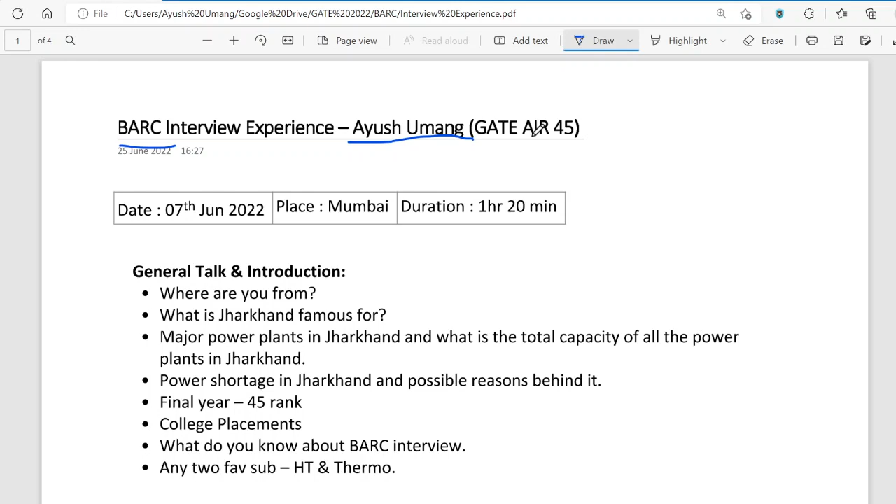In this video, I will be sharing my experience of BARC interview which took place on 7th of June in Mumbai. So let's start. In my interview, it went somewhere around 1 hour and 20 minutes.

Talking about the BARC interview, it is one of the most difficult technical interviews in India. They basically grill you for about an hour and judge you based on your technicals only. There will not be any HR question as such as what happens in other PSUs. They will judge you on your technical knowledge and concepts only.

So first they will ask you to sit in a chair in front of the panelists, and there they will ask few questions about yourself, for 5 to 6 minutes, just to calm you down so that you don't have any nervousness, and they get a clear picture of your understanding of concepts.

So for the first 5 minutes, they asked me about myself, where I am from. I told I'm from Jharkhand. So they asked what is Jharkhand famous for, and I answered that there are a lot of coal mines in Jharkhand and a lot of minerals are available in Jharkhand.

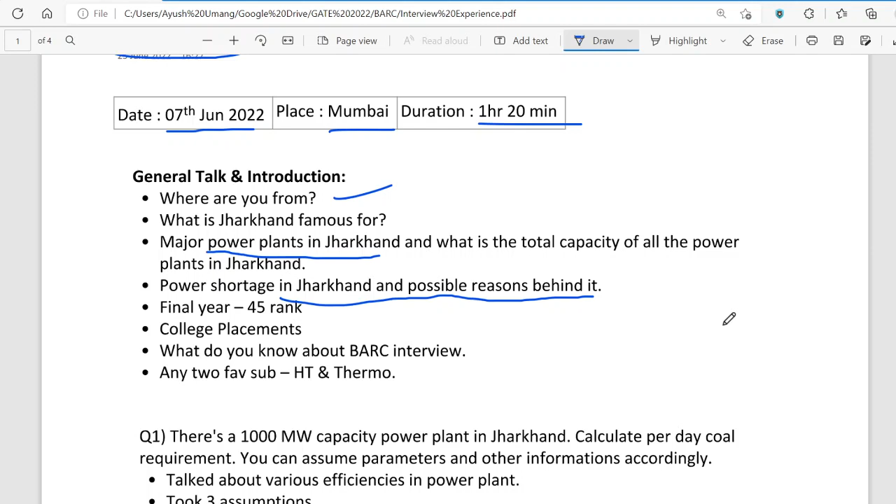Then they asked questions on what major power plants are there in Jharkhand and what is the total capacity of all the power plants in Jharkhand. I told them a few names of the power plants, but I could not answer the total capacity. Then they asked, there is power shortage in Jharkhand, what could be the possible reason behind it? I answered that there are some political reasons behind this and all that, but they were not satisfied.

After that, they asked me about my GATE score, which I scored in final year. They talked about that for a few minutes, and then they asked me about my college placements. I got placed into Hindalco Industries, and they asked what package does it offer, what is the place of posting, and all of that.

Then they asked, do you know about BARC interview? And I answered them yes. Then they asked, what happens in BARC interview? And I explained them for a few minutes.

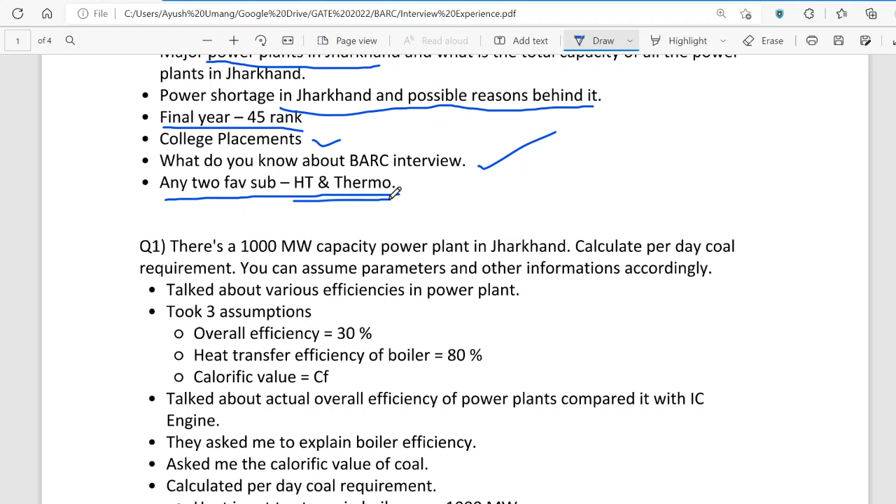Then they asked me any two favorite subjects, and I told them heat transfer and thermo. But after that, they said that we are not going to ask questions from these two subjects only, we are going to ask questions from each and every subject of BTech. Are you comfortable? I said yes, sir.

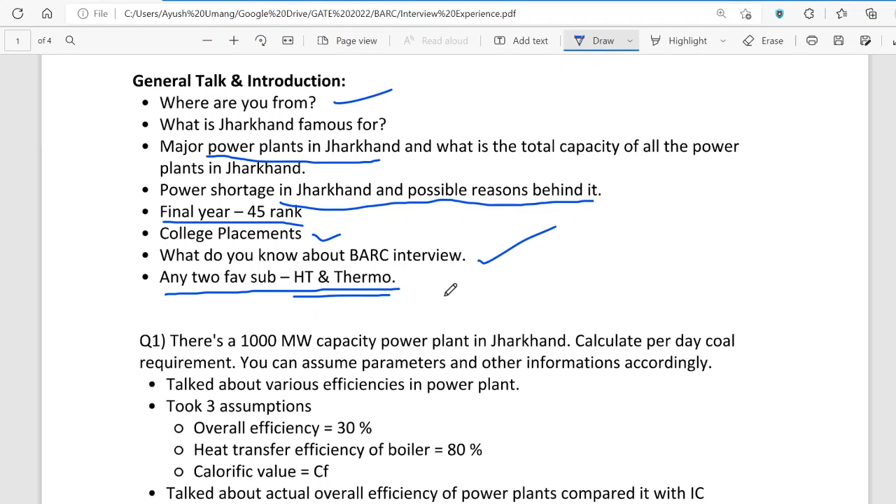Then they asked me to go to the blackboard, and my technical interview then started.

So one panelist then asked me to suppose there is a 1,000 megawatt capacity power plant in Jharkhand, and I need to calculate coal requirement on a per day basis. You can assume parameters and other information accordingly.

Then I approached the problem talking about various efficiencies in power plants, and I took a few assumptions, like overall efficiency at 30%, heat transfer efficiency of boiler at 80%. I did not know the calorific value of coal, so I assumed the value to be Cf. I asked them, sir, I don't know the calorific value of coal. Then they told me that I can assume any variable.

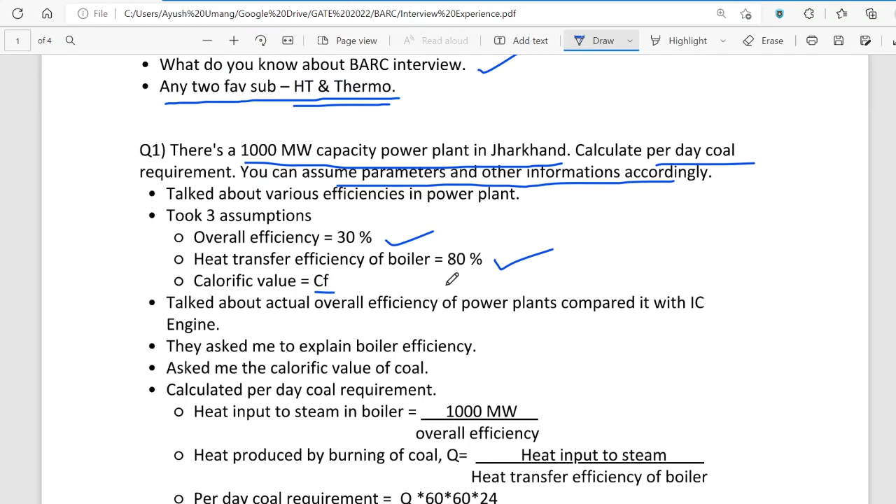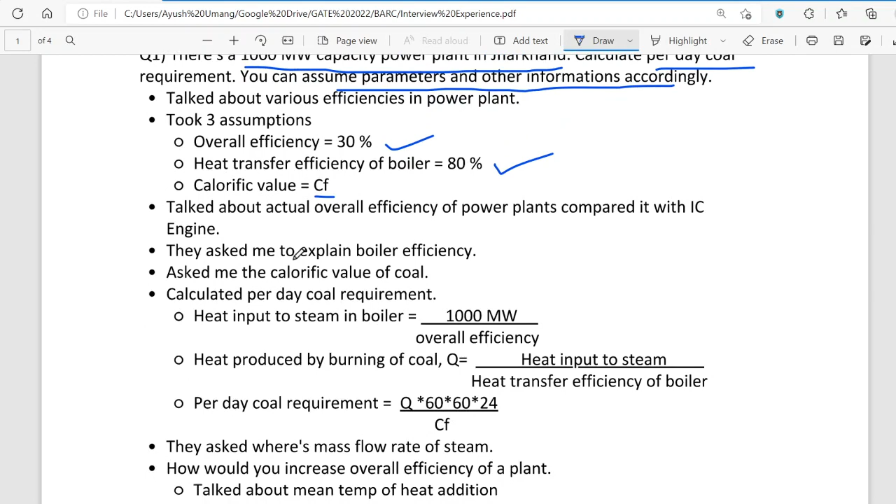After that, we had a few conversations about overall efficiency of plant - why I had taken 30%, why not 70%, 50%, or 10%. Then he asked me to compare it with IC engine efficiency. What is the efficiency of an IC engine? Why is the efficiency of a power plant more than an IC engine?

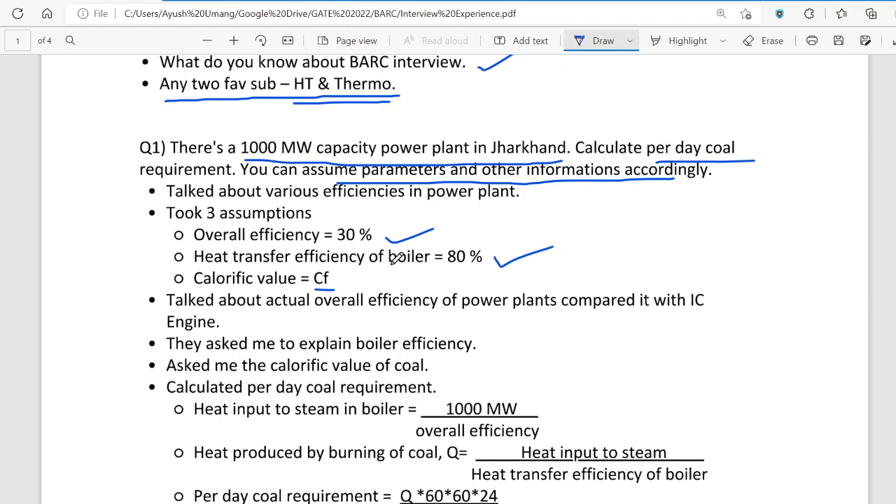After that, they asked me to explain boiler efficiency. What is boiler efficiency? I had taken boiler efficiency in my calculations.

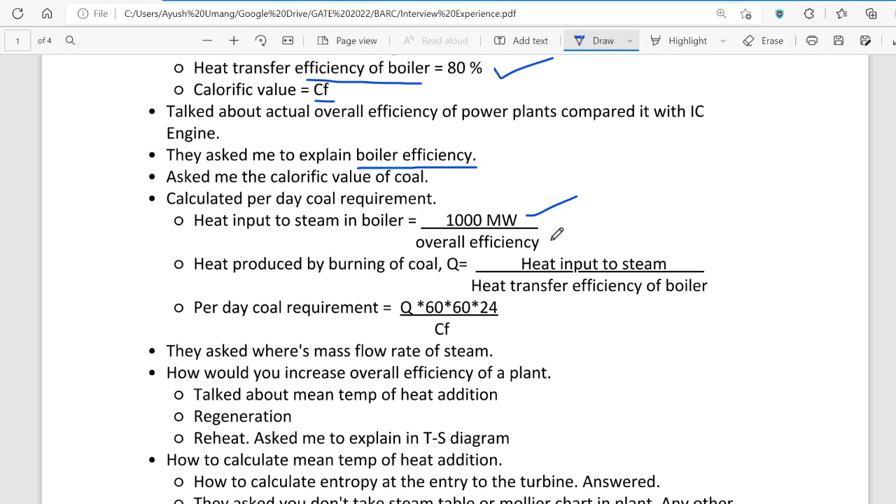After that, I used these formulas: heat input to steam in boiler - this is our power output. I divided it by overall efficiency to get heat input to the steam, and then I divided it by the boiler efficiency to get the heat produced by burning of coal. The value of Q we got was in megawatt, so I converted it into per day basis by multiplying by 60 seconds, 60 minutes, and 24 hours, divided by calorific value of coal to get per day coal requirement.

After that they asked me, you have not taken mass flow rate of steam in your calculation, don't you need that - just to confuse me. And I told them that sir, mass flow rate is not required in this calculation, because our calculation is already based on time, on a per second basis, and here I just need to convert it into per day basis.

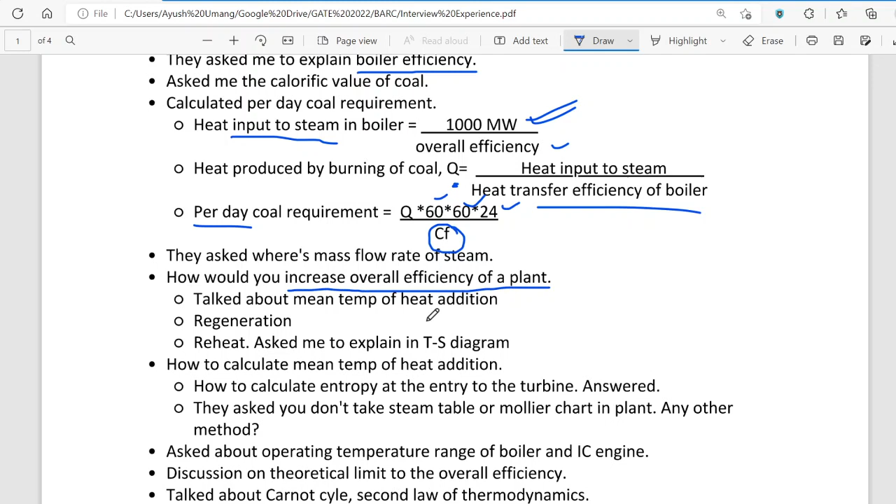Then they asked me how you can increase the overall efficiency of the plant. I talked about the mean temperature of heat addition, regeneration, reheat, and they asked a few cross questions on these two, and asked me to draw a TS diagram and explain all three topics on the TS diagram.

Then they asked how would you calculate mean temperature of heat addition in plants. I answered that we need entropy at the entry of the turbine and at the exit of the pump, and using that we can calculate the mean temperature of heat addition.

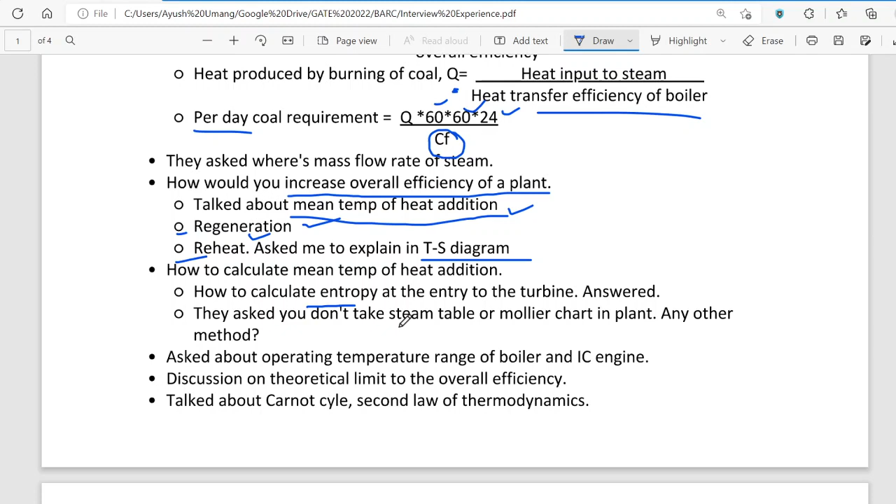He then asked, you don't take a steam table or Mollier chart in the plant, so is there any other method to calculate entropy? I was not able to answer this, because we have only studied calculating entropy using the steam table and Mollier chart, so I answered clearly that I don't know any other method of calculating entropy.

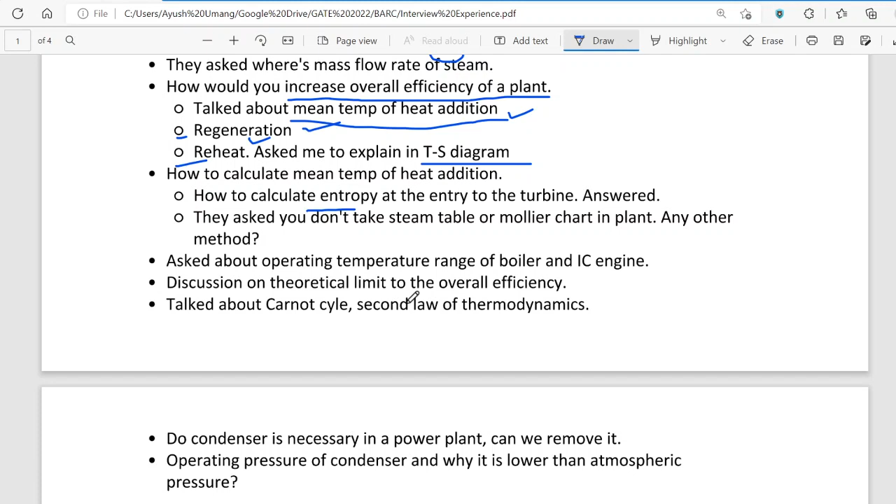Then they asked me about the operating temperature range of a boiler and IC engine. I told them, and then a few discussions went on about the theoretical limit to overall efficiency - why not 50, 60, 70, 80%. We talked about the Carnot cycle and how the upper limit to efficiency is fixed by the second law of thermodynamics.

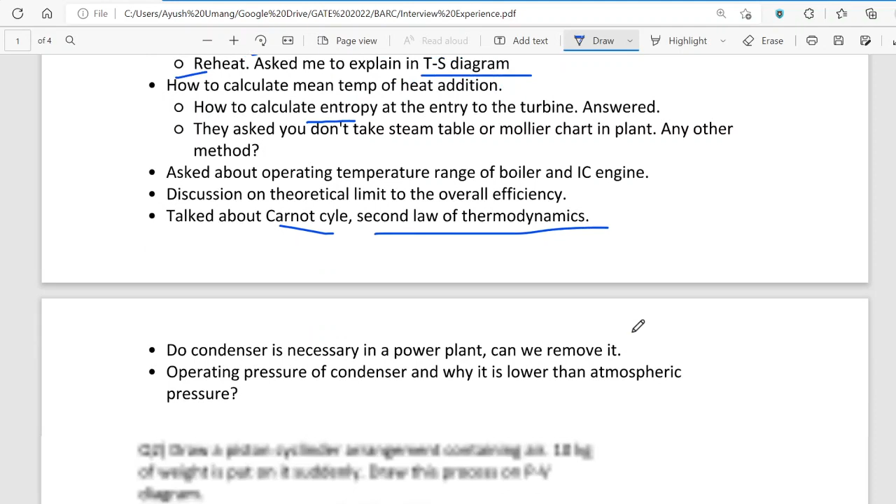Then they asked a question on the condenser - why is it necessary in a power plant, can we remove it or not? I told them. Then about the operating pressure of the condenser and why it is lower than atmospheric pressure - why not higher or equal.

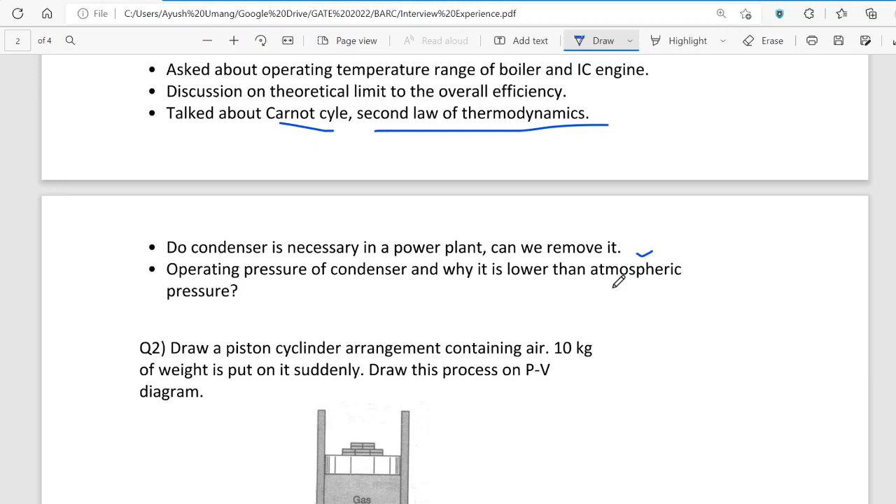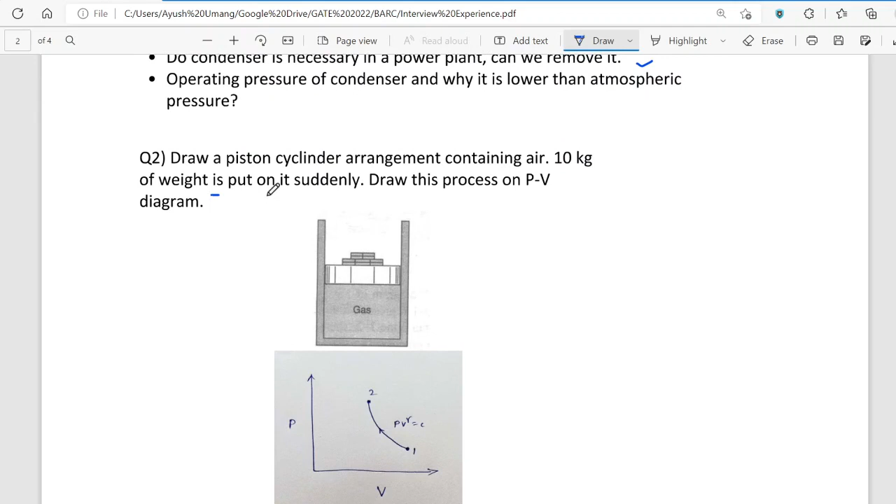After that, another panelist asked me to draw a piston cylinder arrangement containing air, and said that 10 kg of weight is put on it suddenly, and asked me to draw this process on a PV diagram. Because the weight is put on suddenly, it is an adiabatic process, and I drew the adiabatic process 1-2 as shown in the figure.

He then asked what is adiabatic and why it is adiabatic - I explained. Another member told me to leave it for a long time after putting the weight and now draw the process. I told them that if we leave it for, say, infinite time, heat will start flowing out of it, and this would be a constant pressure process - constant pressure heat rejection. So this would be the process.

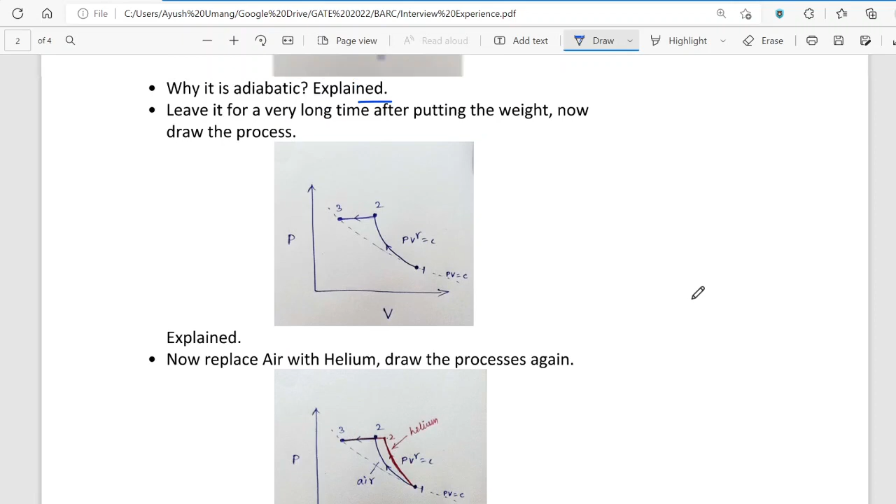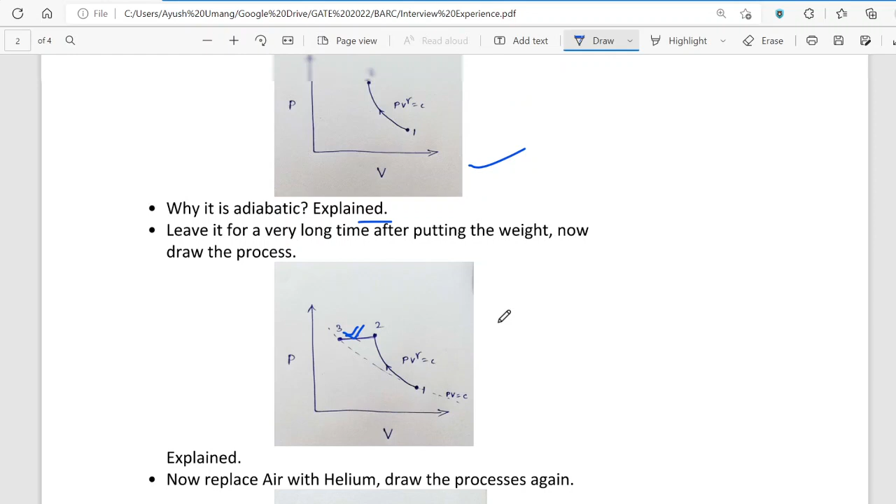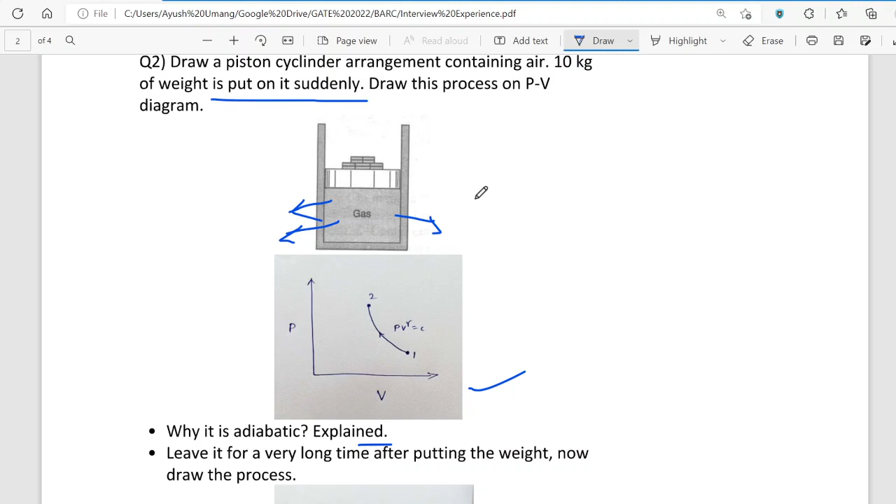Then he asked how would you point out this point 3. I told them we can point out point 3 by drawing an isothermal line from point 1, because the dead state, which is reached after the gas is in equilibrium with the surroundings, is at the same temperature at which it was initially. I explained this.

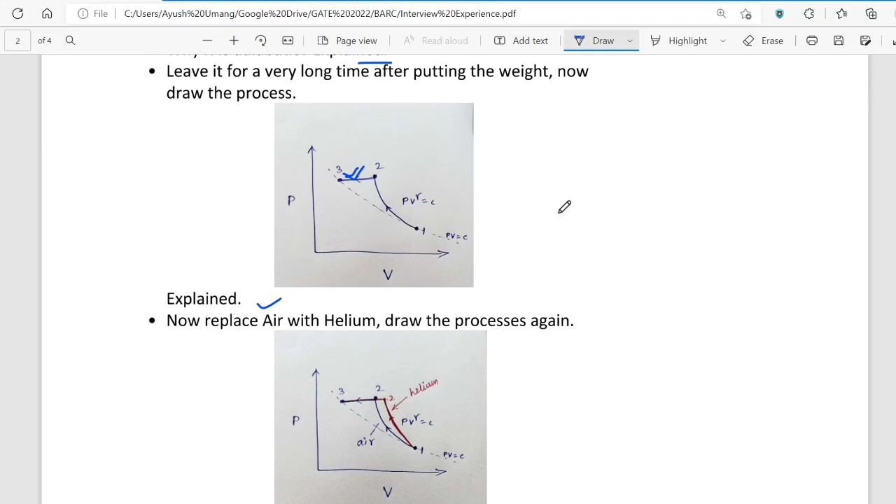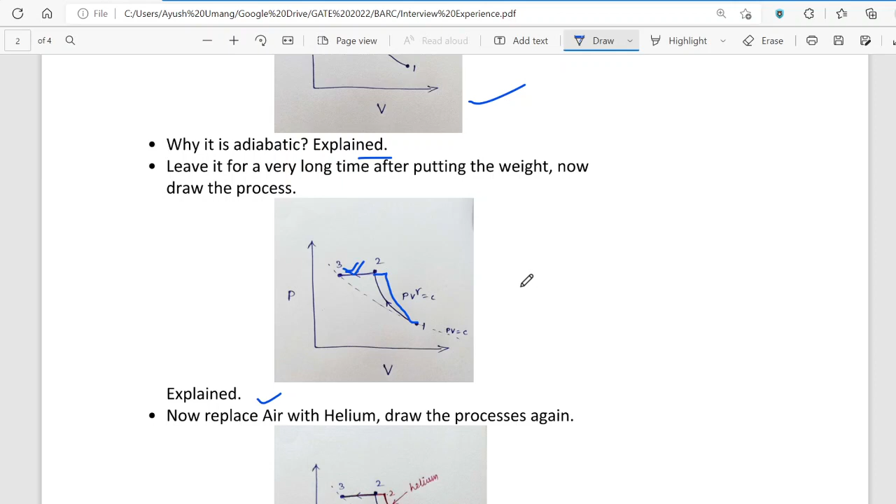Now they asked me to replace air with helium and draw the process again. I answered that this process would be the same, but the slope of this line would get shifted like this, because the adiabatic index gamma of helium is greater than that of air - 1.67 as compared to 1.4 for air. So this would look like this.

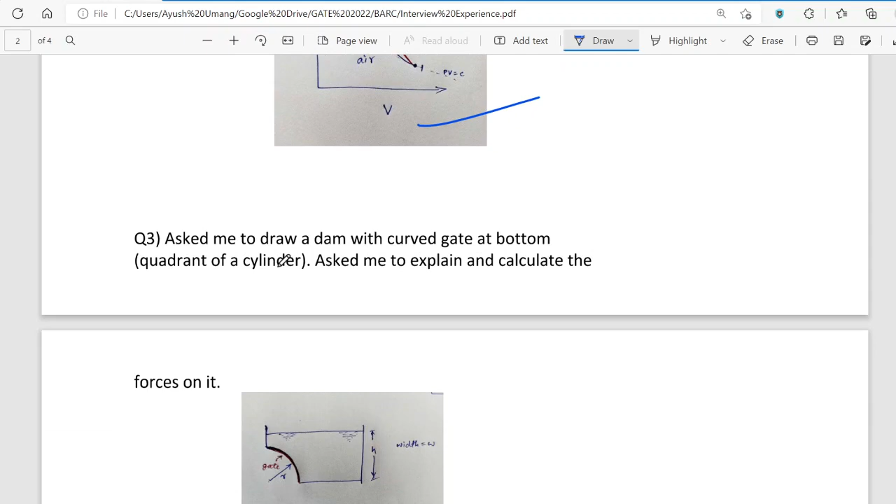They looked satisfied. After that, another member asked me to draw a dam with a curved gate at the bottom, like a quadrant of a cylinder, and asked me to calculate forces on it. I drew something like this, and he asked me to calculate forces on this curved plate. I explained that this would be the vertical and this would be the horizontal force acting - the horizontal force would be equal to the pressure at the CG multiplied by the projected area, and the vertical force would be the weight of water carried by this part of water.

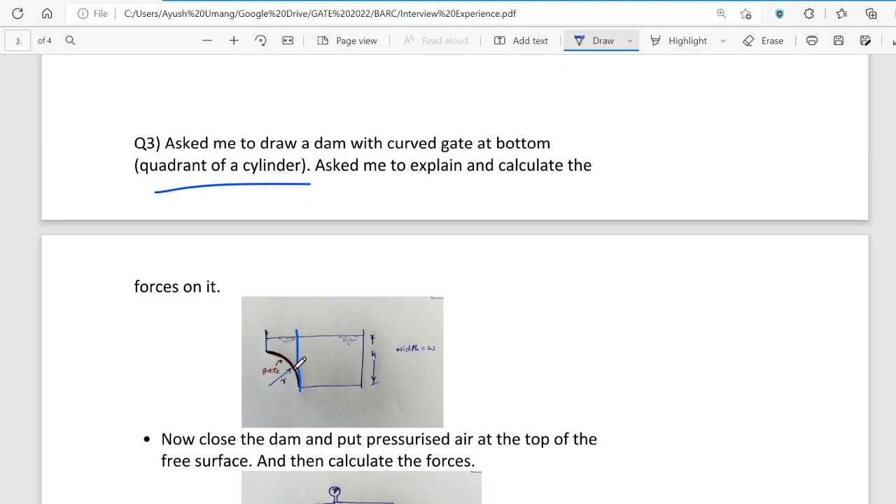After that, they asked me to close the dam from the top and put pressurized air at the top of the free surface, then calculate the forces. I explained that we can imagine it to be water at this level, where this height would be equal to the head of pressure of the air.

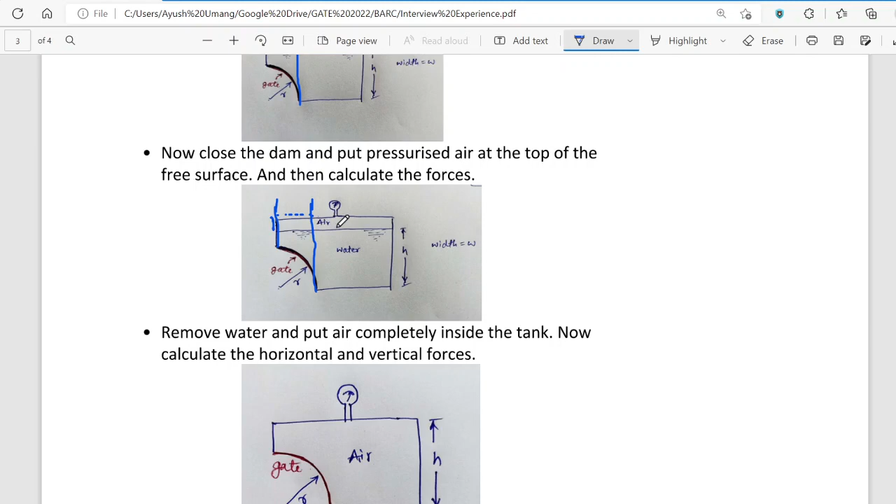After that, they asked me to remove the water and put air completely inside the tank, and now calculate the horizontal and vertical forces. I got confused for some time, but then I approached the problem and told them the vertical force would be the same as the imaginary water one, but that was the wrong answer. After thinking for a few minutes, I concluded that the density of air is very small, so the gradient of pressure in the depth direction would be negligible.

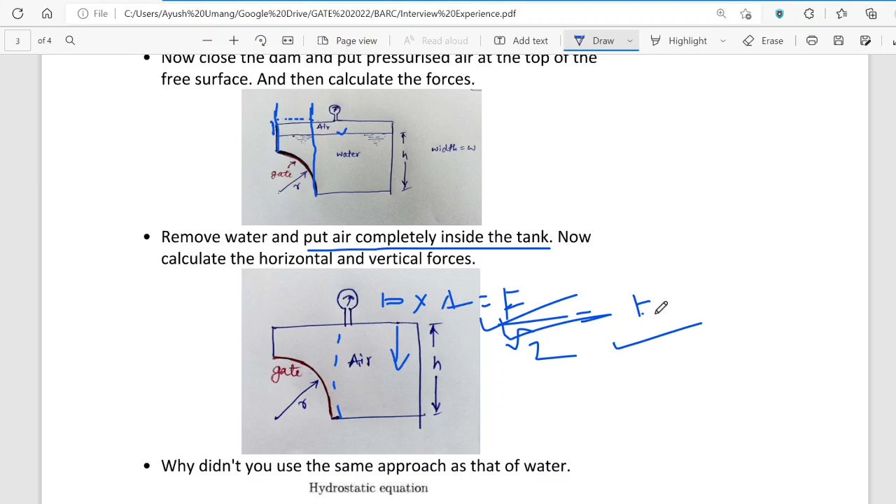Because of that, to calculate the force on this curved surface, we just need to calculate the pressure and multiply it with the area of the curved surface, which gives the overall resultant force. If we multiply it by cos 45 degrees, that is divide by root 2, we get the horizontal force, and the same would be the vertical force.

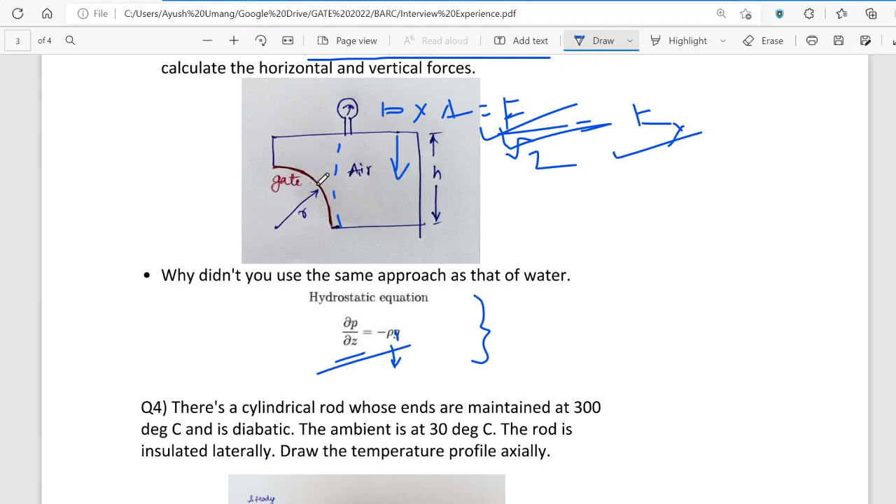Then he asked me why I didn't use the same approach as that of water to calculate vertical forces, weight carried by the curved surface. I explained using the hydrostatic equation that rho is very less, so the pressure gradient is very less, so we don't need to do that. We just need to multiply the pressure with the area of the curved surface to get the resultant force. If we break it into horizontal and vertical components, we get the vertical and horizontal forces.

Then another question was asked from heat transfer. They asked me to draw a cylindrical rod whose ends are maintained at 300 degrees Celsius and is diabatic, meaning heat transfer is allowed on the end surfaces, while the lateral surface is insulated. The ambient is at 30 degrees Celsius, and they asked me to draw the temperature profile axially.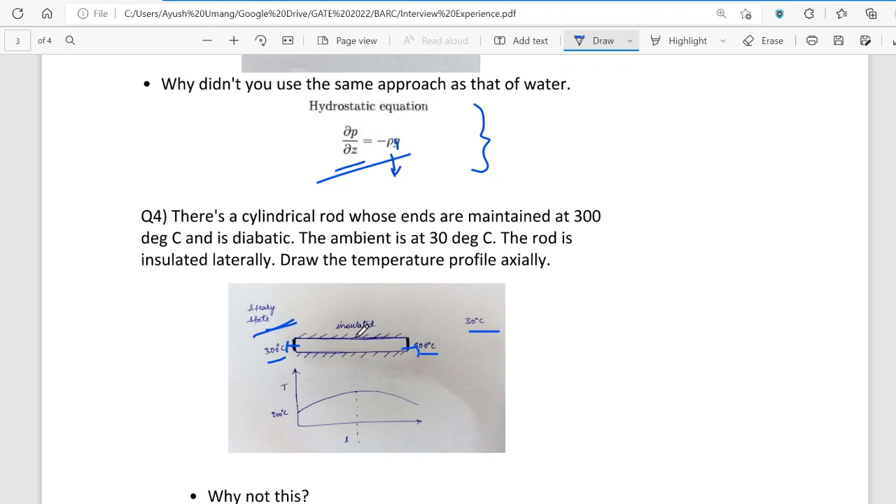So I drew something like this, because if this is at 300 degrees Celsius and it is in steady state, then there must be heat generation inside this rod, and because of that the temperature would be maximum in the middle and decrease gradually as we move outwards. So the temperature profile would look like this, with maximum at the middle point because of the symmetry condition.

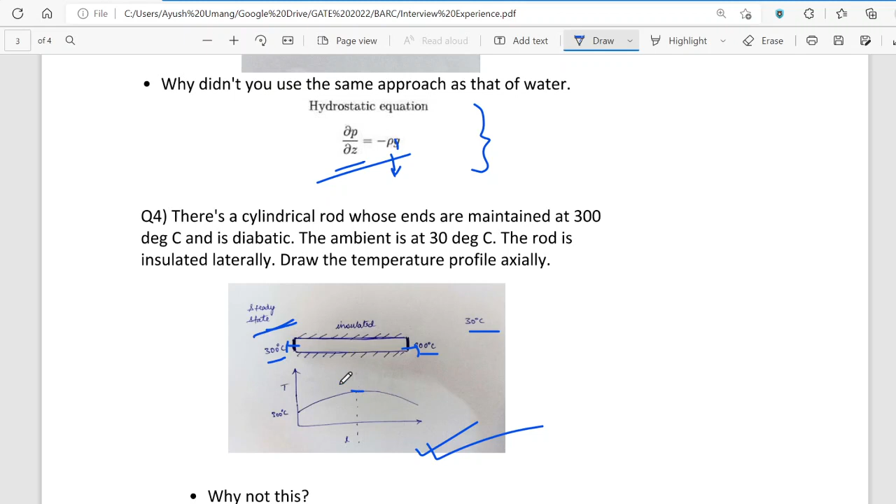Then they asked why maximum at this point. I explained that at this point heat transfer is from this side and that side, and they would be equal, so the net heat transfer at this part is zero. Because of that the slope had to be zero there, and because of symmetry conditions, the left and right hand sides should look symmetric, with the slope increasing gradually.

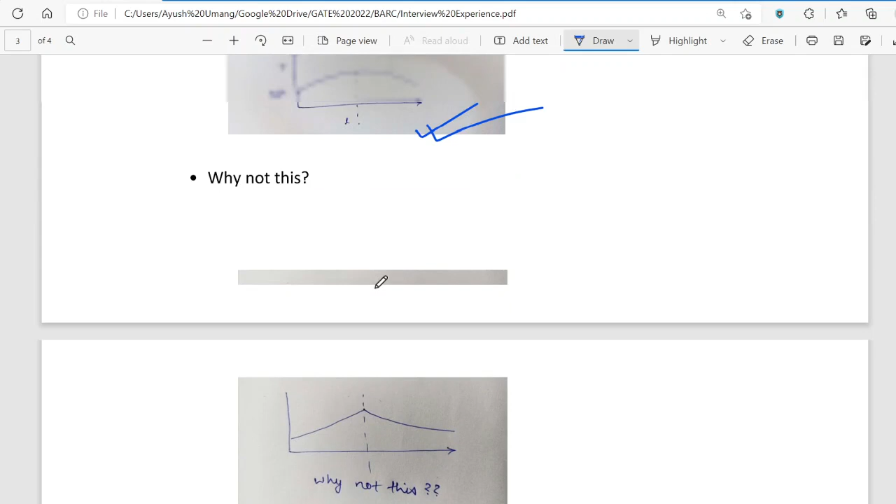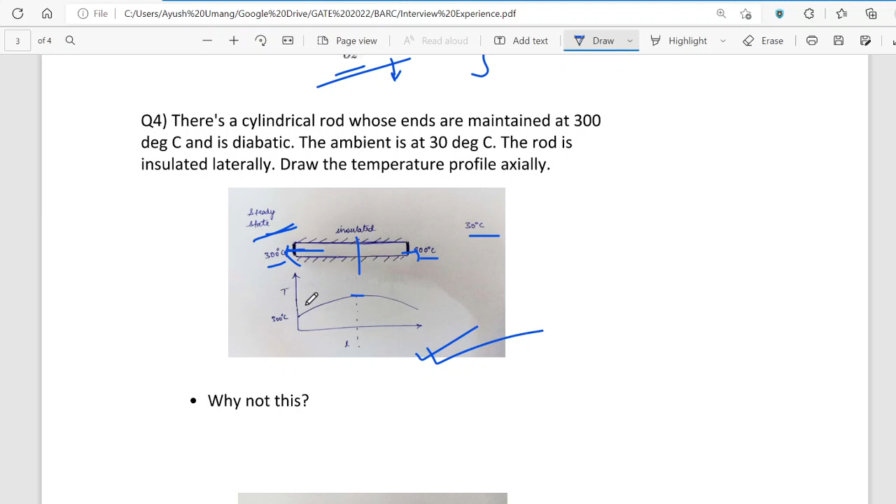Then they asked why not like this - why is your slope decreasing, why increasing, sorry, why not decreasing like this. I answered that the heat transfer rate would increase as we move outwards from the middle point. So because heat transfer increases, the temperature gradient should also increase, meaning the slope should increase, with maximum at this point.

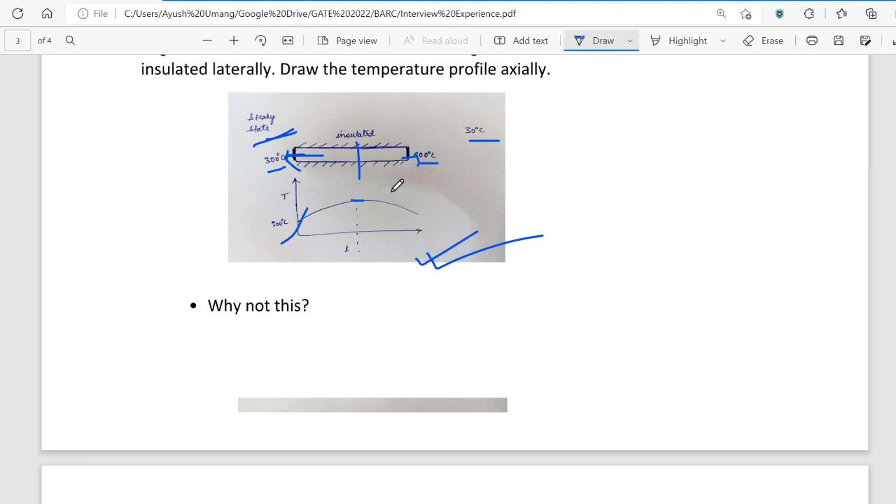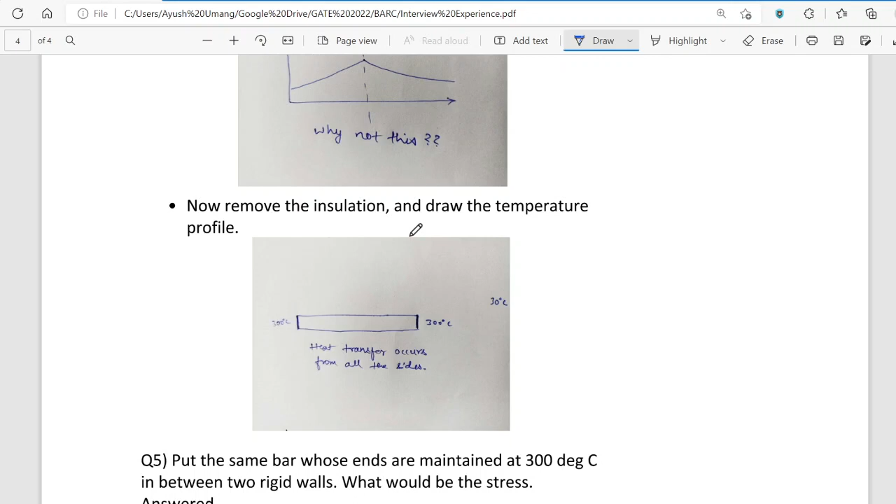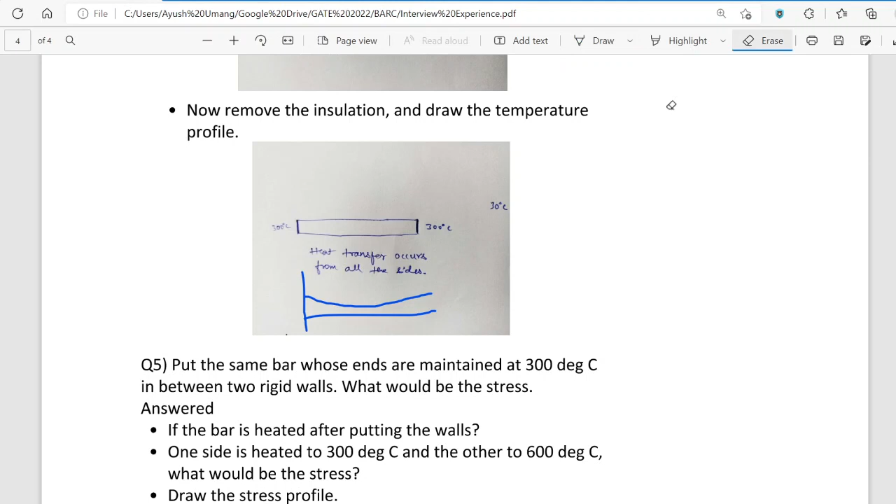Then they asked me to remove the insulation and now heat transfer is allowed from all sides of the cylinder, and asked me to draw the temperature profile in that case. I tried to approach the problem, did a few manipulations, but did not have much confidence in that answer. I drew something like this, but I was not sure, and I told them that I'm not sure. They said that's all right.

Then another panelist asked me the last question from strength of materials using the same bar. They asked me to put two rigid walls on the sides of the bar, which is maintained at 300 degrees Celsius, and calculate what the stress would be in that case. I told them if the bar is initially maintained at 300 degrees Celsius from both sides and then put between the walls, there would be zero stress.

But then they asked if the bar is heated after putting the walls - meaning the walls are first put and then the bar is heated to 300 degrees Celsius from 30 degrees Celsius - what would be the stress. I told them thermal stress would be induced, compressive in nature. In the first case, we heat it to 300 degrees Celsius first and then put it between two walls. In the second case, we take a bar at 30 degrees Celsius, fix it between two rigid walls, and then heat it to 300 degrees Celsius. In the first case, stress would be zero; in the second case, it would be a finite value.

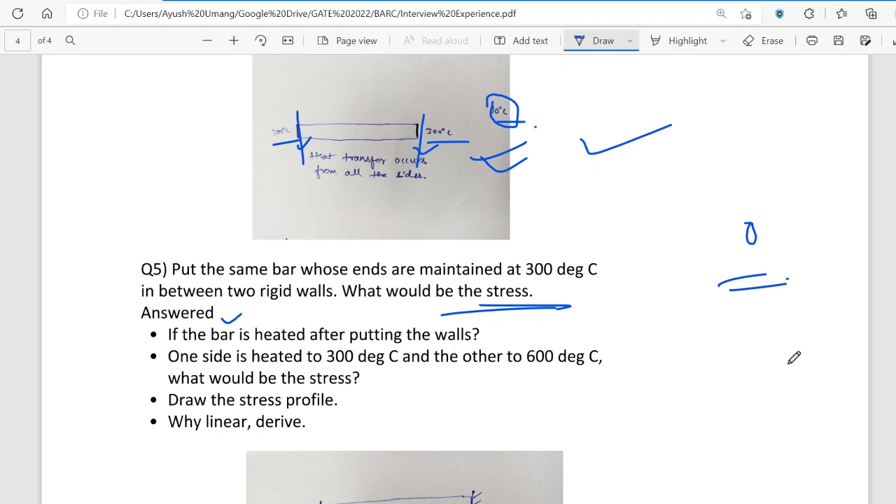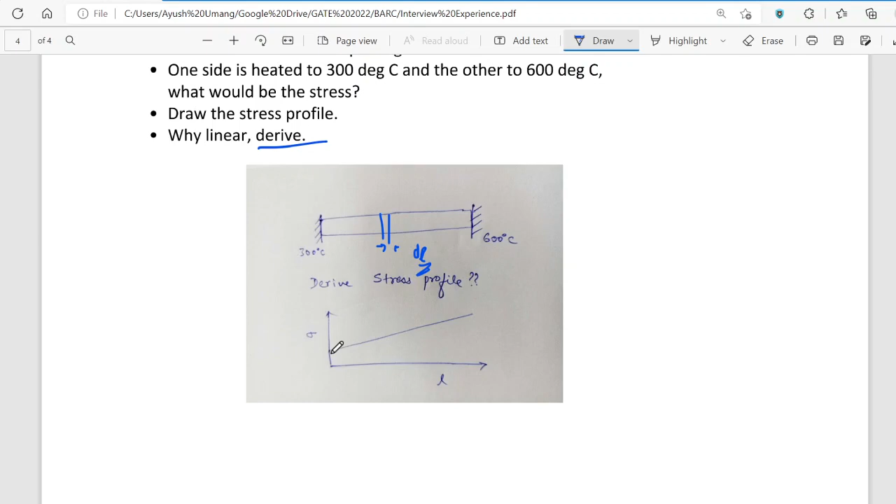After that, they asked if one side is maintained at 300 degrees Celsius and the other at 600 degrees Celsius, to draw the temperature and stress profile. I drew something like this. They asked why linear, why increasing, why not constant. I answered, and then they asked me to derive this mathematically. I derived it by taking a small segment of dl length, and found the temperature profile to be linear.

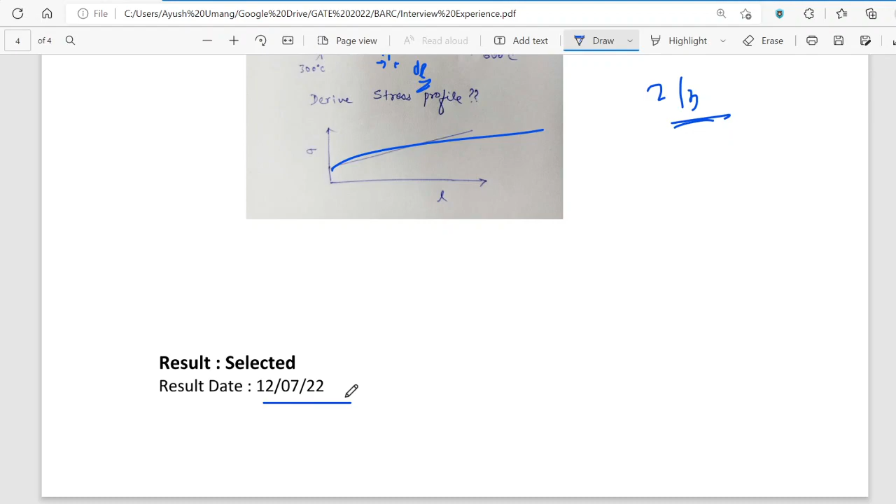So that's all about my interview. Five questions were asked from me, and only 2-3 subjects were covered. Questions from only 2-3 subjects were asked, and my final result came yesterday, that is 12 July 2022, and I got selected in that. So that's all about my interview.